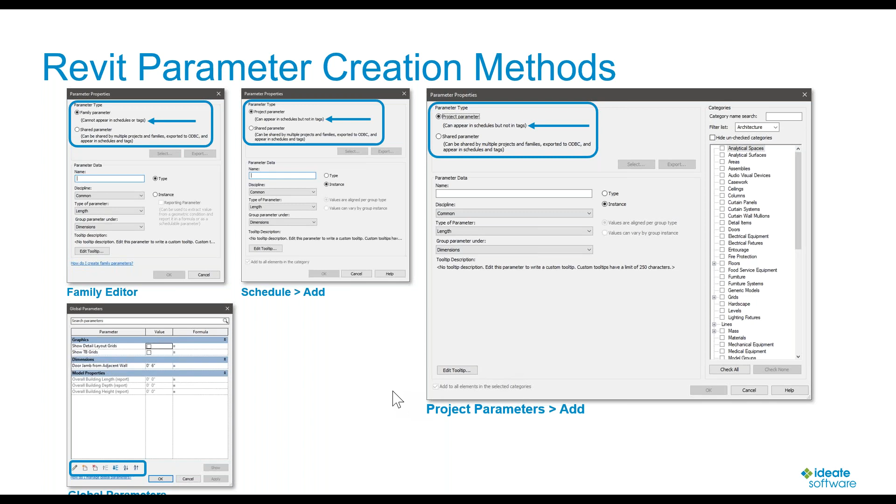And the other important thing to remember about global parameters, because this question does come up often, is how do I schedule global parameters? The answer is you cannot schedule global parameters. And the reason why is they don't have categories. However, whatever values you set in here, when they get pushed into a parameter within a certain category of an element, that is the element that you end up scheduling, right? So the values will still schedule depending on the category, but you don't schedule these types of things over here. So just something to keep in mind when you think about global parameters.

Real quickly, this is just very high level, nothing earth-shattering, but as a reminder, the instance versus type parameters, when we look at it from a project perspective, right? And again, be thinking about should a parameter be a type-based parameter or an instance-based parameter. Very important things to keep in mind. Now, over here it says project parameter, right? One of the things you want to keep in mind when you're creating parameters, and I always have to ask myself this question: if I need a new parameter, should the parameter apply to an entire category?

And again, I'm not saying you're going to use architectural supplemental instructions number as a real parameter in here. I just made this up. But let's just say for argument's sake, I want this to be an instance-based parameter, meaning each individual instance that's in my model can get a particular number, right?

One thing to keep in mind when you're creating a project parameter is when it gets assigned to a category, every element of that category will end up seeing this parameter value show up in the properties list, right? And is that appropriate? Maybe ASI number is appropriate. However, be thinking about this. If you do create a project parameter and that parameter has nothing to do with other elements in that category, is that okay with you?

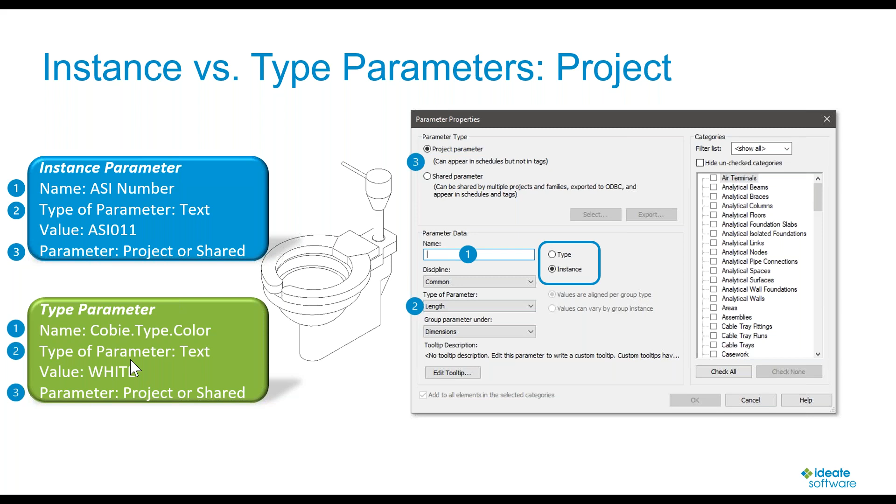And for type-based parameters, if it's assigned just to that particular type, be thinking about, should it be a type-based parameter? So for example here, type color, I mean, even just the name of the parameter with the word type in it really implies that it's representative of that type. I have a toilet and it comes in this particular model and the only color option is white. That to me makes sense as a type-based parameter, right?

All right, and then looking at families, again, because you can have family parameters as we discussed before, which do not appear in schedules or tags, versus a shared parameter, which again can be scheduled and can be tagged. So a good example of an instance parameter, and maybe I should be careful about what I say. I do like to use instance-based yes/no parameters to toggle visibility. That's a really great example, right?

Show the flush valve. Okay, fine. That's maybe more of a graphical type of thing. That would maybe be on a per toilet basis, potentially. You could also make it a type parameter if you wanted to, and kind of turn off all the flush valves in one click of a button. You can certainly do that kind of stuff if you want to.

But also looking at type-based parameters like recycled content, right? And again, you need to decide if that needs to be scheduled, then in this situation, it needs to be a shared parameter if you're going to apply it within the family. Now, if recycled content is going to apply to all the plumbing fixtures in your entire project, then maybe you want to consider making that a project parameter, right? Because again, you don't have to add that parameter to the family. I don't want to use the word append, but it kind of almost appends itself when you make it a project parameter.

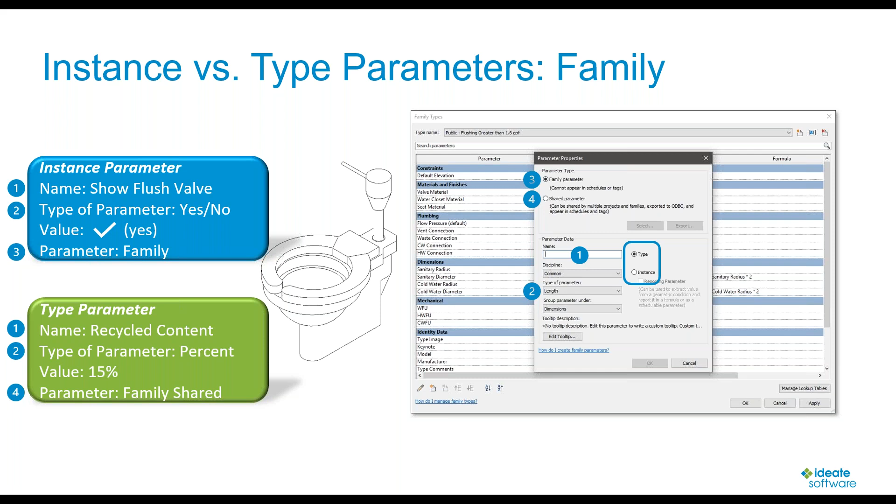But just kind of keep in mind, you really need to understand the different situations and when to use a certain parameter. Again, you can see here, there's a lot of stuff going on. And then, the reality is when you load up the families, when you create the global parameters, all this information really comes together in your project, right? In your RVT files, and we can even say your template files as well.

So things like project shared parameters, right? So again, that's where you're in the project, you say add parameter, I click on shared parameter, and I pick a parameter from my parameters list. That's the project shared parameter, right? And then the project parameter is one that can appear in a schedule, but can't appear in a tag.

That again goes back to, do I just want to go parameter add and just say, I'm going to put the ASI number, and it will apply to all elements in a certain category, no matter where I get the content from, if it's internal content that I've created or I downloaded it from a manufacturer, that's great. I don't care to tag it, but I still need that information in a schedule. That's where it's appropriate to have it in a project parameter scenario.

And then the ones we didn't really talk about were system parameters. These are those hard-coded parameters that come with Revit. Things like project information type parameters or the view and sheet type parameters as well. And then of course, within system families, where most of us are probably familiar with like the fire rating parameter. It's a built-in type-based parameter, right? Mark value, type mark value. Those are all basically hard-coded built-in parameters.

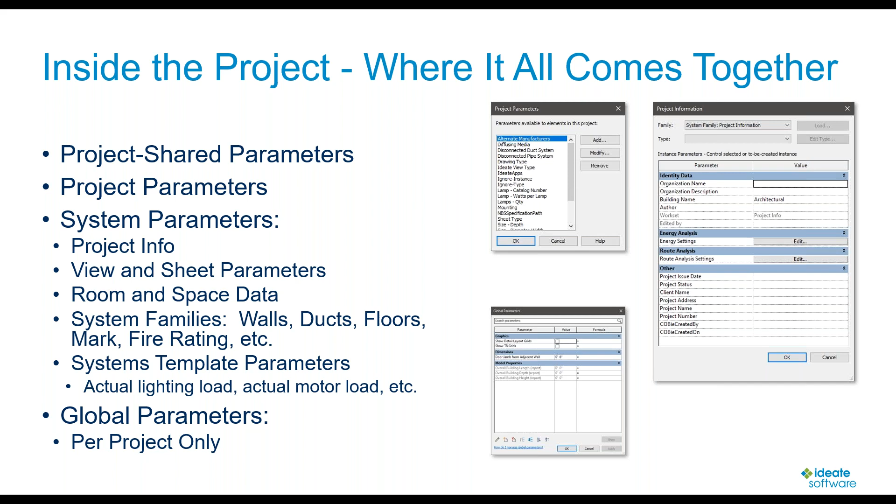Again, you can't schedule those particular parameters. They're agnostic when it comes to categories, right? But however, the resulting values, you can schedule those based on whatever category you're scheduling. So just a couple things to keep in mind there.

The other thing too, we've probably all run into this before, and especially early on in my Revit career, I definitely was not understanding parameters. And we've probably all been looking for the old shared parameters file, right? Where did that thing go? I need to get some of the parameters from it. And that's a little tricky. Luckily, you can actually export shared parameters if you don't have a parameters file. You can write it into a particular parameter file if you want to, and change the category of it and kind of reconstitute that parameter if need be.

But I wanted to point out this example here because I think it's a very appropriate one. Here's an example of two toilets, right? Both have a parameter called ADA compliant. They're both shared parameters. And if you look at the graphics of the dialog boxes, they both appear to be the same. And I'm guilty of this. Years ago, when I needed that shared parameter again, I was like, oh, I'll just recreate it. And the reality is you go to fill in the data or you go to schedule it and you realize that the values aren't populating. Even though the parameters look the same, they may smell the same, the reality is they're not the same.

And if you've actually explored a shared parameters file, you'll see this GUID, right? Which I believe stands for Global Unique Identifier. And that's how Revit identifies a parameter and how it can associate it with a component, but also a tag. They both have to have the same value in order to talk to each other. So if you ever try to make your own shared parameter, make the name the same and all of that, and you go to tag the element and the value's blank, that's because the GUIDs are different.

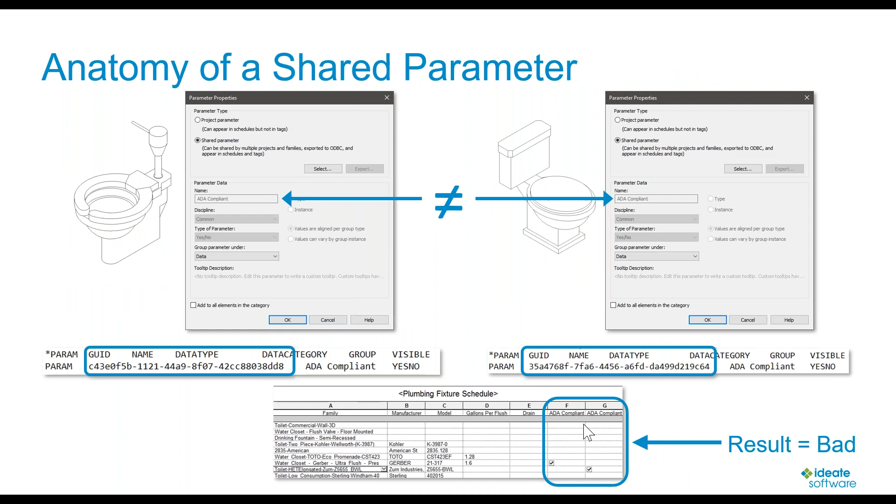And one of the neat things that you can do is if the project parameters are the same name and the same category assignment and so forth, if all that data lines up, you can actually schedule that information in a single column, as opposed to what you see here where we get two columns of data. If you've never tried this out, you should play around with it. It's kind of fascinating.

But thinking about doors, just as an example here, where I have maybe a core and shell model, I have some doors that may be on the exterior, and then I have another model that's an interiors model, and let's just say a consultant's doing the interiors build out. If we want to schedule the same parameter information in the same column, be thinking about how maybe using project parameters may be a wise choice.

Now, again, that's if you want to use project parameters as opposed to shared parameters. The real question is, do you want to schedule it and tag it, or do you just need to schedule it? Those are all things that you need to consider when deciding what type of parameter to pick. Again, you want to get that stuff in your BIM execution plan, get that stuff hammered out before you just start modeling and doing things in your projects.

All right, Richard, before I give a brief demo to everybody, I thought maybe it'd be good to just ask people in the audience, how are you actually currently using global parameters? So Richard, if I may have you go ahead and launch the poll, let's just get some feedback from everybody, because I want to talk a little bit about global parameters, but let's get some information to see how or if you are actually using them. And if you're not sure, that's okay, but we'd love to get some information.

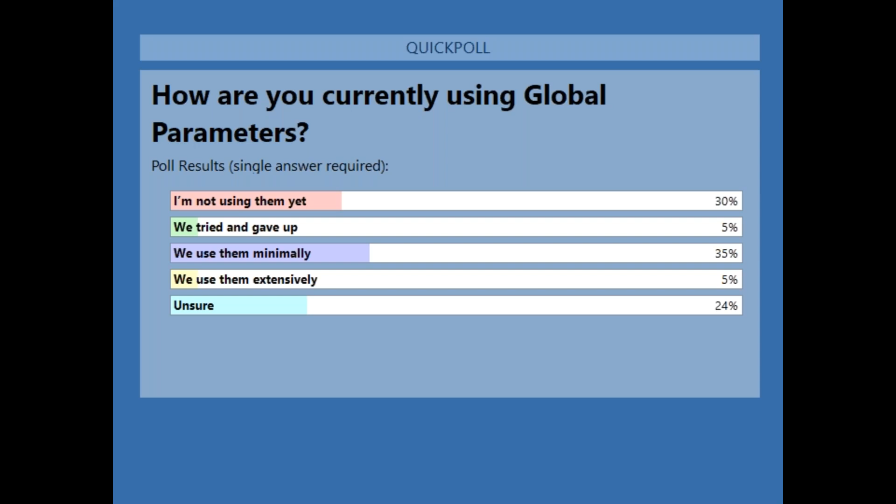All right, so you should see my screen, and I'm going to just real briefly talk about two components here, two features here. Again, not earth-shattering, but just kind of as a reminder. We're going to talk just a little bit about key schedule information, because I love key schedules, and some of the changes that happened finally between Revit 2021 and earlier and Revit 2022. And then I'm also going to talk a little bit about global parameters as well. And then we're going to do the polls and have Jesika speak.

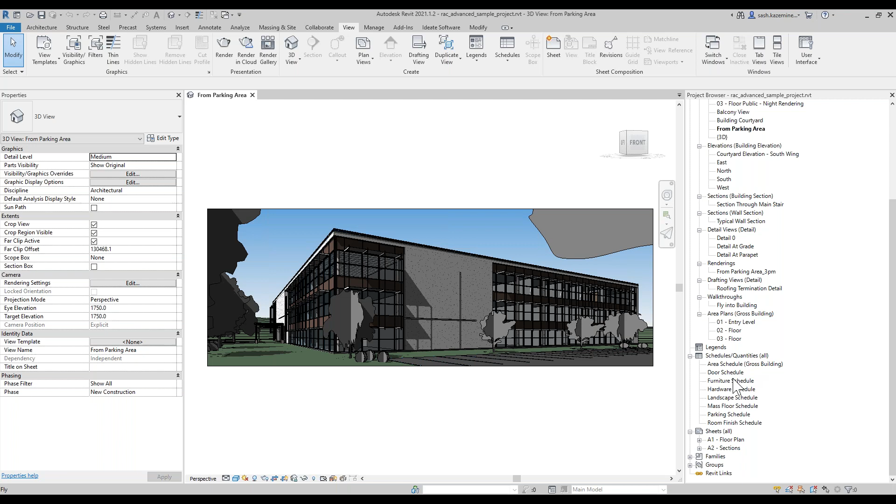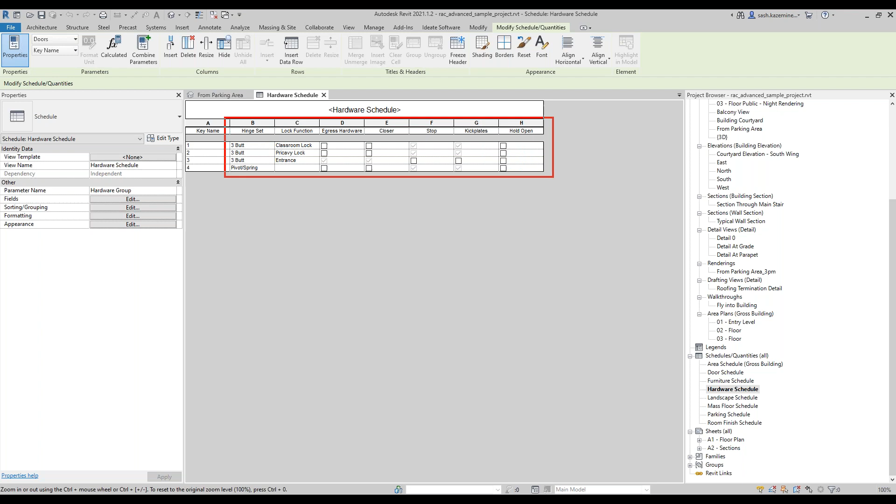But one of the things I want to point out in this Revit 2021 is there was a big limitation that has basically been going on for many years in Revit. I'm going to come over here to a hardware schedule, which is basically just a key schedule. And one of the challenges I think that a lot of people ran into, and this is also like for occupancy calculations, is kind of a similar situation. But the idea of creating a key schedule here and assigning, shall we say, values for a particular, let's say, hardware group, right? I'm just using the out-of-the-box Revit example here.

One of the challenges here is if I come over to the edit fields, you have the ability, of course, to create parameters, which is lovely, right? So it's really nice. But we quickly noticed, most of us did at least, that your only option here is project parameters. And the downside to that, once again, is it cannot appear in a tag. So what if you had a tag that needed that information? Well, this has been a challenge for eons, right?

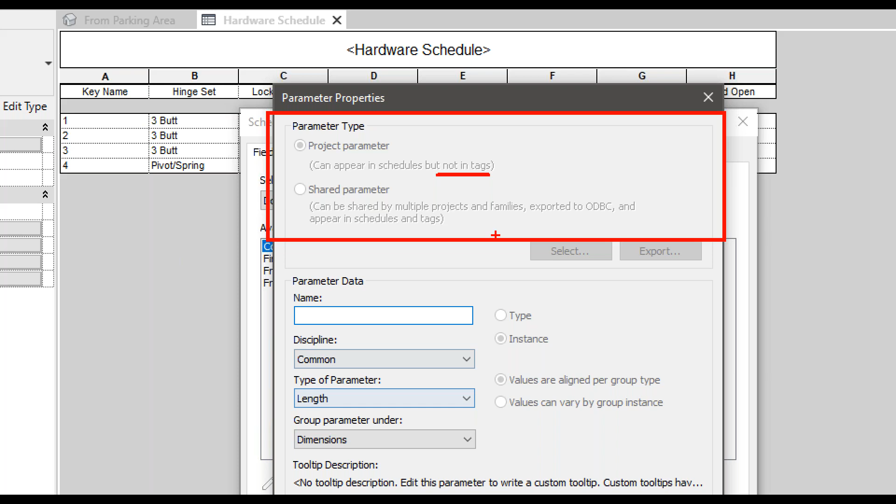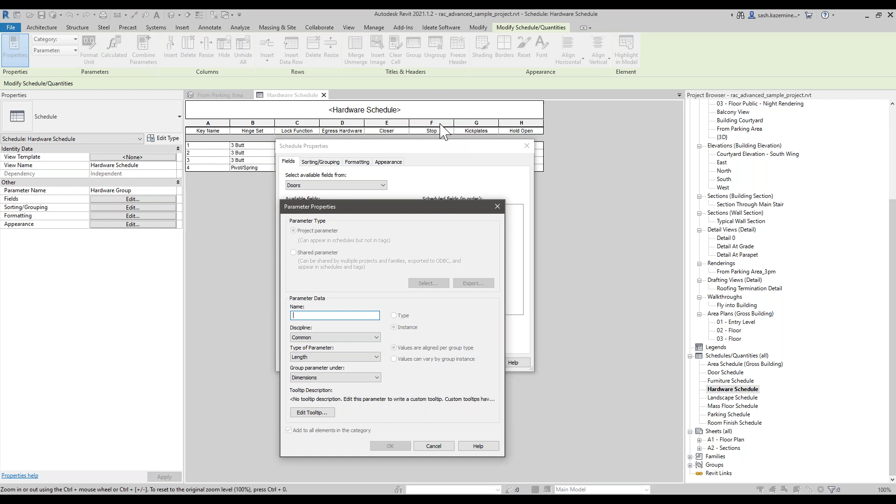So the solution was you had to create, shall we say, a parameter for a tag that you would then basically schedule the results of, this field here as an example, let's say column F, and then you would have column G as the tag value, and you'd have to copy those values from column F to G so you can get that information to show up in a tag. And we use BIMLink all the time for that. We'd say, okay, great. We'll take this column of information, export it out, paste it in here, bring it back in. But if any of the data changed, it was not synchronized, right? So this has been that issue for eons, okay?

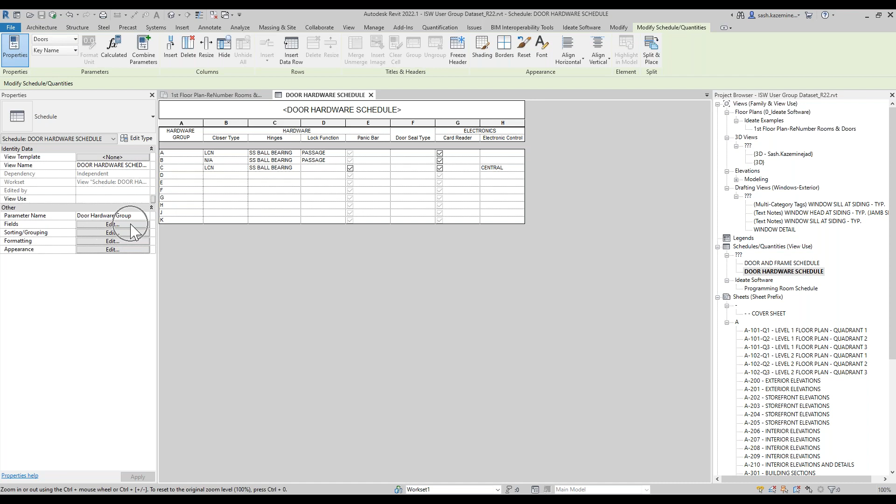But thankfully, Revit 22 now actually solves that issue. And again, just going to make this really simple here, but if I just come over to, let's say, a door hardware schedule, just as an example, and you can see this is not fully filled out, but that's not the point here. Looks the same as any sort of hardware group, but now when I come over to the fields over here, and I come over to the create, this is what we've been waiting for a long time. And again, why do we want a shared parameter? Because I want it to not only appear in the schedule, which is what it's doing now, but I want it to appear in a tag. This is something that we've needed for a long time, right?

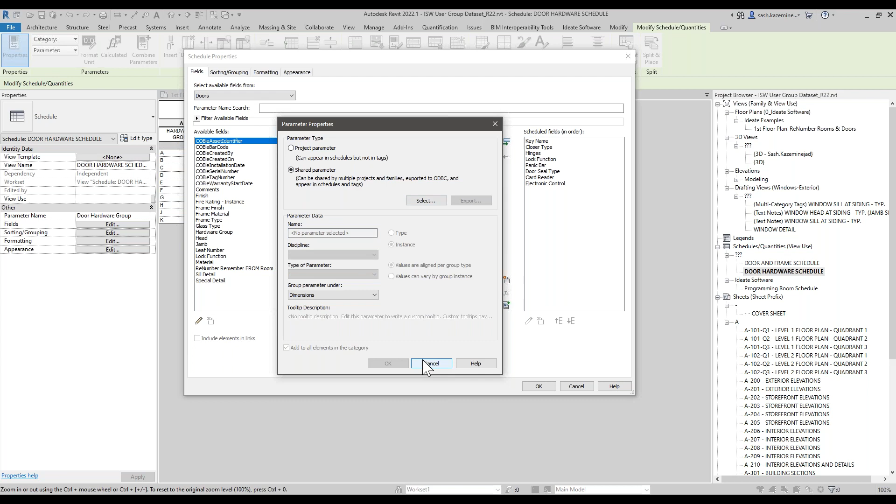So again, you just know the process. You come to shared parameter, you select it, etc. And the nice thing is it'll show up in this list just like a project parameter. But the big difference is, and again, this example I'm showing you here may not be exactly what you want to do, but what's really nice about this is you can actually assign these, the hardware group here, and it will fill in that information and I can tag it.

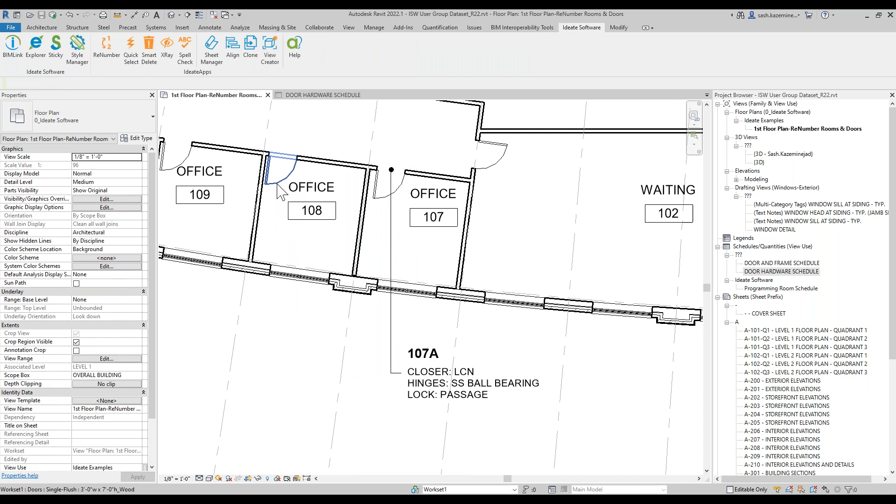So as an example here, if I select this door, and again, it could be a door, it could be a piece of mechanical equipment, it could be a column, it really doesn't matter what it is. But you can see here when I select it, I can see some of the information from that key schedule show up in this list, right? And you can manually input that information if you need to.

However, if I come down here to the door hardware group and pick a particular group, let's say it belongs to A, what's nice is it fills in this information over here, which is what I want, and it puts a little equals over here that says the parameter is set by a key schedule, right? So that's something that is really, really helpful in this situation, right? So I'm glad that they finally implemented this.

It's been a long time coming, but I wanted to just kind of point that out to you, that you now have the ability to do that. So if you weren't aware of this, this is a 2022 and newer feature. So be sure to check that out. It may resolve some of the challenges that you're running into.

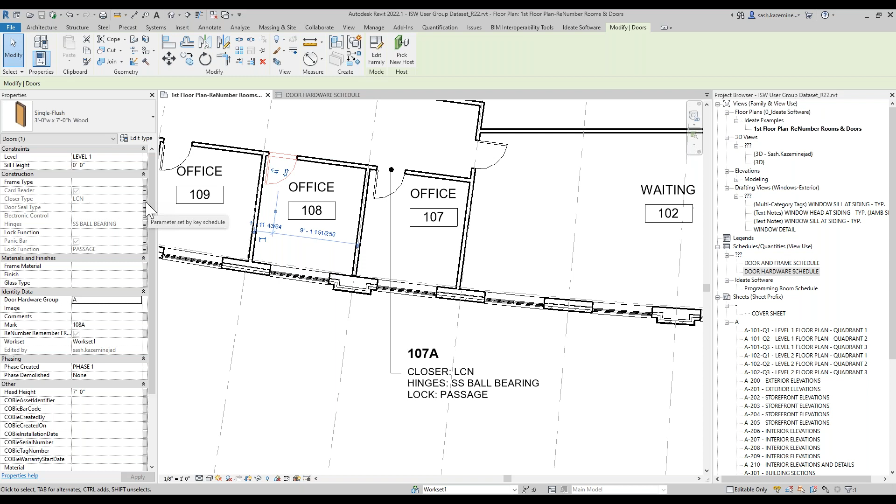Okay. And I see a note from Tom here. We'll talk about that for sure later on.

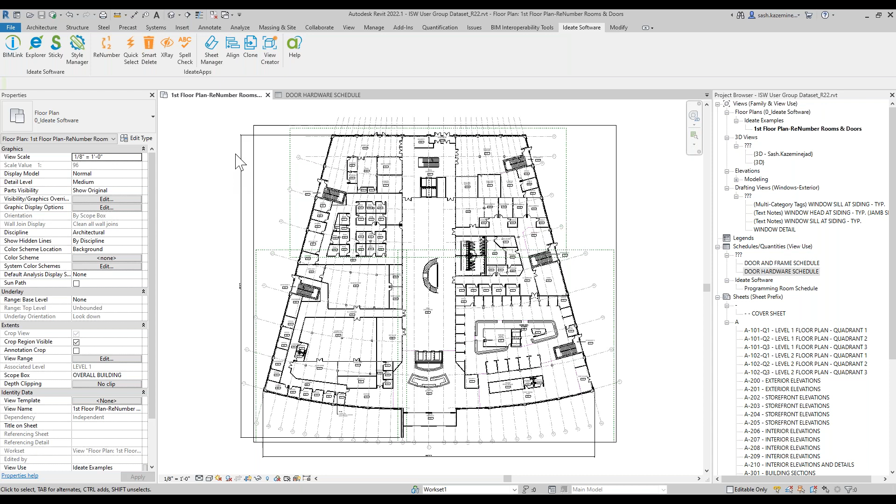All right. Now, going back to this poll that we had over here, which is, how are you currently using global parameters? I would love for those folks that are using them minimally and extensively, if you get a moment, type in the questions panel, let us know how you're using them. It'd be great to kind of get an understanding, but I figured I'd just take a few minutes and just talk about global parameters. Again, what I'm showing you here isn't earth-shattering, but nonetheless, I wanted to just kind of mention some of the ways that you can use them.

You'll see over here, again, I just have kind of an overall dimension that may represent the building width and depth, and I can certainly have one for a height. If I come over to the Manage tab and I come over to Global Parameters, here's where you can create some global parameters. And the creation process for global parameters is very similar to creating any sort of parameter in Revit. However, there is no option here to pick a category. Okay, so as I mentioned before, they have nothing really to do with categories, and you can't schedule the global parameters themselves. You can only schedule the resulting value from whatever category of information they're being pushed into.

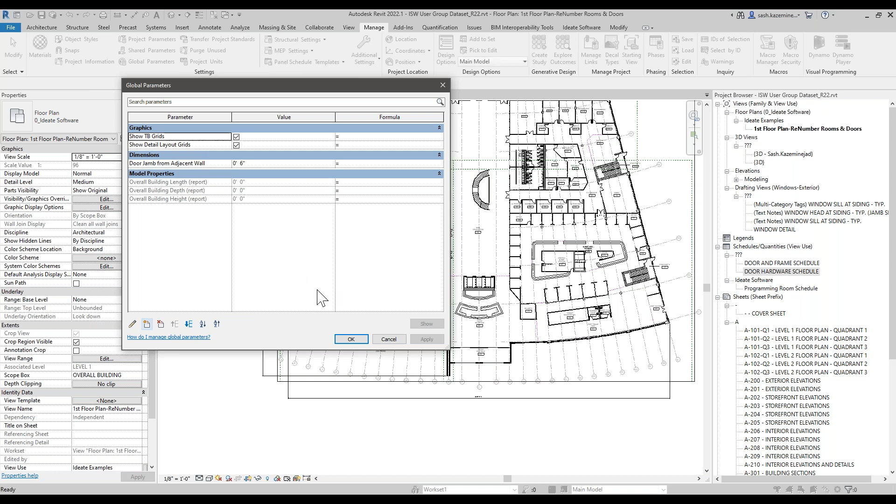But you can see over here, I've created a few parameters that are just kind of reporting parameters. This door jamb from adjacent wall, maybe you have some sort of office standard that says all your doors or all your furniture or all your equipment shall be some sort of exact value. I don't know, I'm just kind of throwing that out there, okay? And you can see I have some visibility ones, which is kind of the one that I had picked up from Brian Mackey. I was like, oh my gosh, why didn't I think about this before? But let me just show you real quickly how this kind of works.

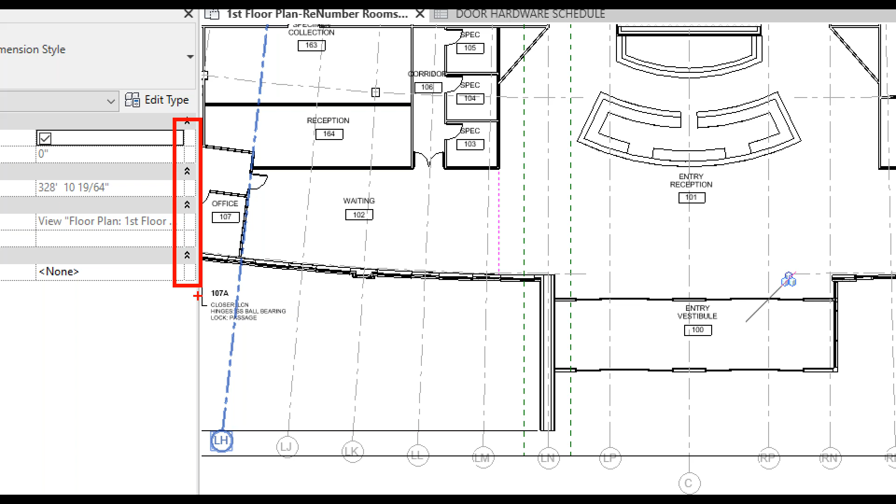As an example here, if I take this dimension over here, normally when you assign global parameter information, you'll see this little area right here in the properties dialog box that usually has a button, and you click it and you can associate it with a global parameter. In a situation with a dimension over here, you end up picking a label from up in here. And if I click over here, I could say, just show me the building length, and it's a reporting parameter. And when I do that, it'll show up in my global parameters dialog box, and I'll show that to you in a moment. And if I come over here and pick this, I could say maybe a building depth as a report.

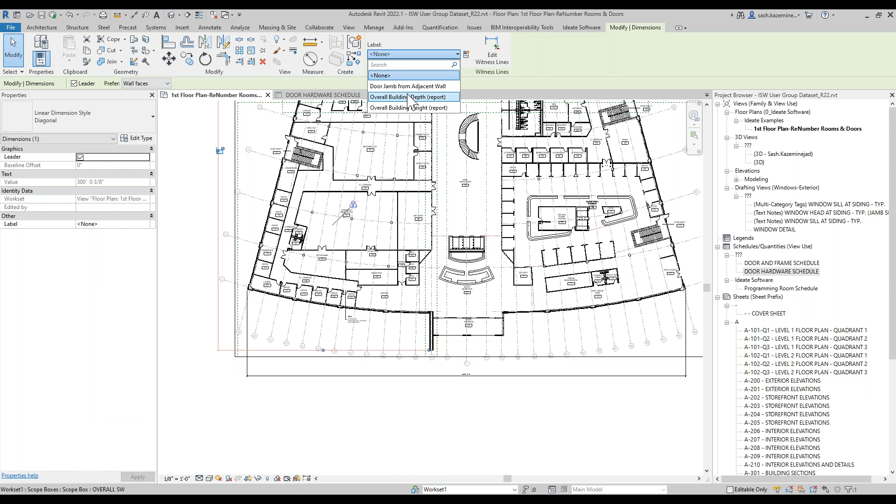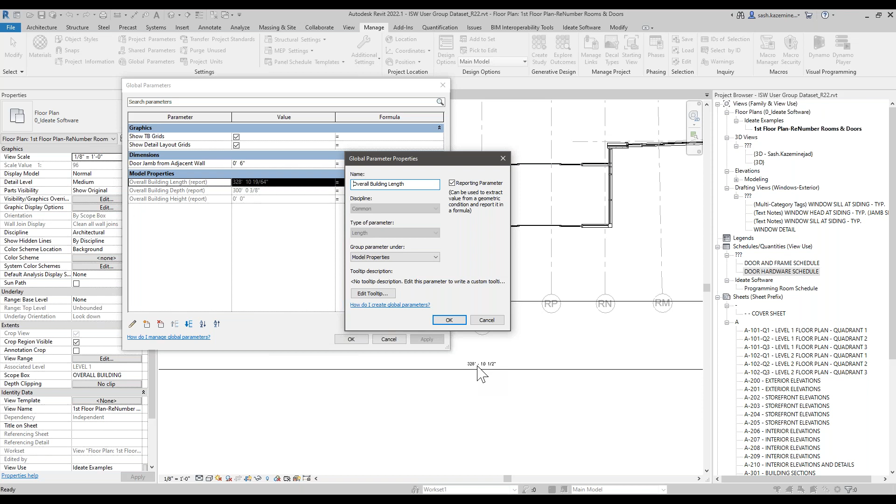And what's interesting here too that I noticed, and we probably have to look at the units for it, but if I come back to the global parameters, we could see here that I'm getting that reported information. And if I go to edit parameter over here, it's not really giving me the ability to change the precision on it. I believe that's going to be a project units overall setting, as opposed to the actual dimensional settings, which can be independent of the project settings. But nonetheless, I can get the information reported in here if I wanted to. So that's another example right there.

All right, what else can I do with some of the global parameters? Well, and again, as I mentioned before, maybe you have some sort of standard that sets a minimum dimension from a wall just for a door jamb. So let me just show you an example of what I'm talking about. If I come over here and let's say drop a dimension from here to here, and again, you want to make sure you hit the doors.

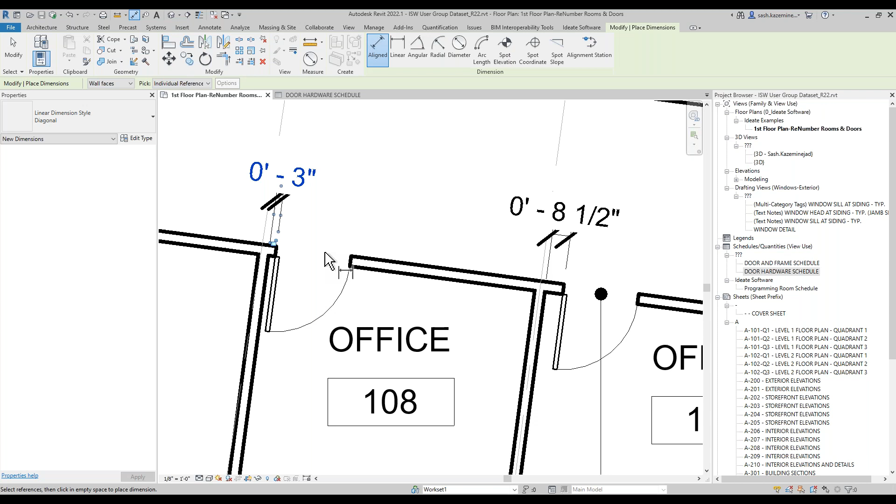This is just a simple example. We see people doing this for concrete slabs. We see people using this for ceilings, like ceiling plenums. Maybe they have a certain depth that they want, so they'll control it all from a global parameter.

So in this example here, you can see I have this 3-inch and this 8.5 inch, and if I select this dimension over here, again, I can associate it with a global parameter. You'll notice over here, I don't see all my other parameters in here. I just see this door from adjacent wall. And if I select it, you can see now they're both 6 inches, right?

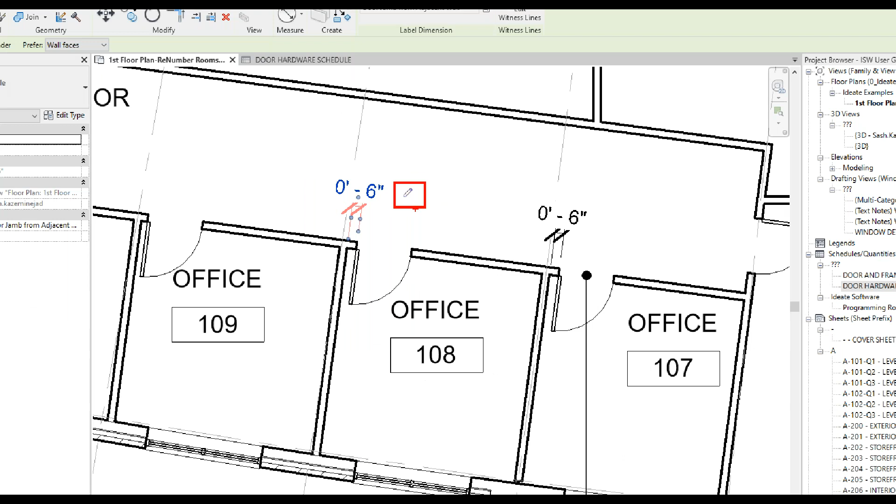And if I click over here, you'll notice this little pencil over here. And that indicates that it is part of a global parameter. And if I click it, it is nice that it launches this dialog box. And if I make it 8 inches, I can hit OK, right? And you can see that they both change.

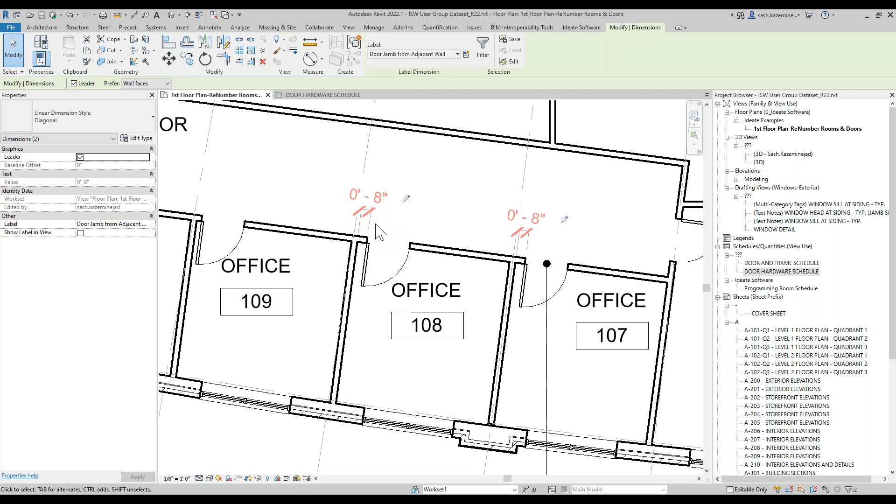So if you wanted to control that and kind of make it some sort of globalized setting, you can do it. Now, if you don't want this dimension to show up in your construction documentation plans, again, you can put these in working views. A little bit more subtle, maybe a little dangerous here is you can certainly remove those dimensions. And you can see here that it's still constrained. And if I hit OK over here, if I do come back to global parameters and let's say I make it 1 foot and hit apply, you can see they still move.

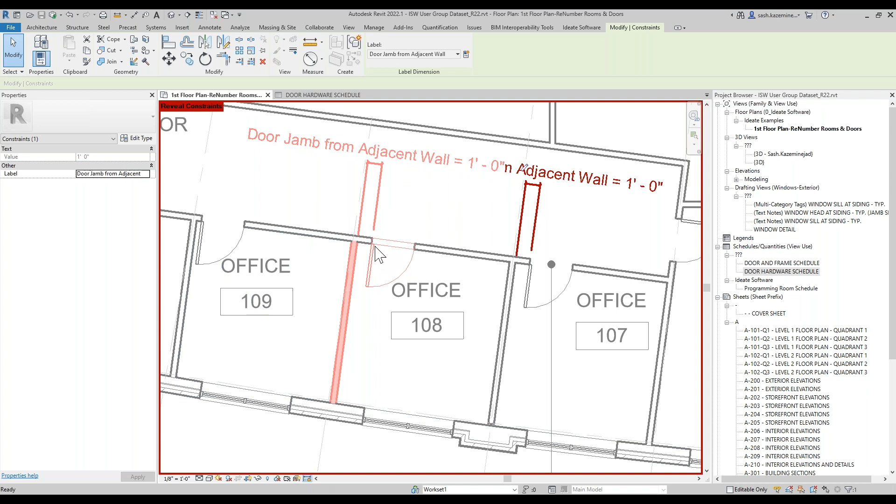And if you're looking for those dimensions, you can always hit the reveal constraints. And that's going to go ahead and show you those global parameters. If you need them to be completely wiped out, you can remove that dimension from there. So that's another example.

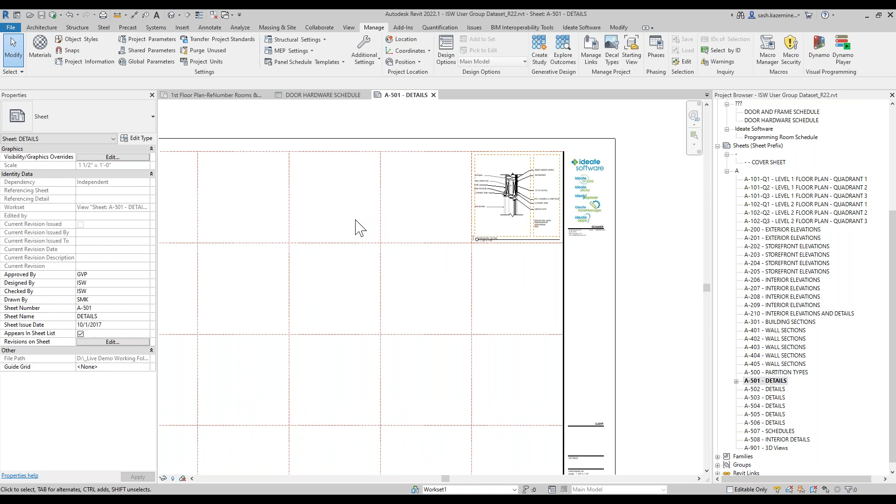And the last one that I wanted to show before we do the polls and give the reins to Jesika is one that I picked up a tip from Brian Mackey. So thanks for this one, Brian, because this is one that I struggled with for a long time. I have a detail sheet over here. And I like my own grid system in here, and I'm using like a symbol family over here that kind of represents like 1 column by 1 row.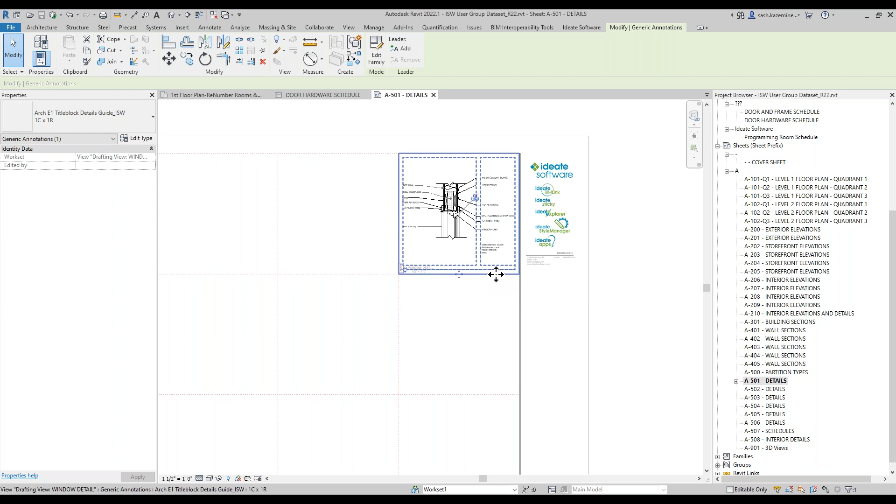And the whole idea behind this is it kind of lays out a framework so that I can get my details and my notes kind of in alignment. And I know people out here use this. I use this all the time. And so one of the struggles that I had was, before I go to print, how can I control this?

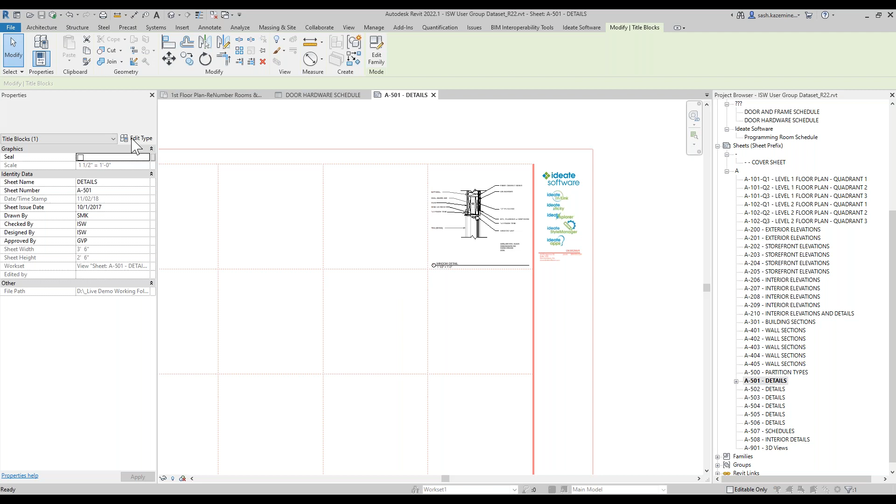Now, I would have to remember to come over here, and if I had tons of these different sizes, depending on my detailing, I would have to come over here and say, okay, great, I got to go to edit type, and I need to turn off my detail guide like so, right? And then for my sheet, I would have to do the same thing. I'd have to come over here, go to edit type, and turn that off, and I have to do that for each one of these before I go to print. That's a lot of work, right? So instead of doing that, let me just go ahead and undo this.

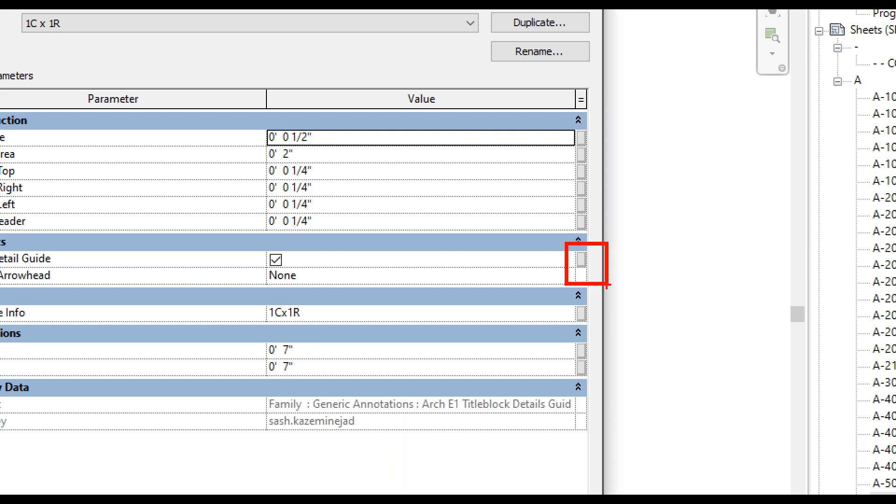What I can do here is I can associate this with a global parameter. So you saw me earlier mention that you'll see buttons over here that allow you to associate that. And so in this example over here, I can click on this and say, oh, I want to associate it with a global parameter. So this is my detail layout grids over here. And now you see it grays it out.

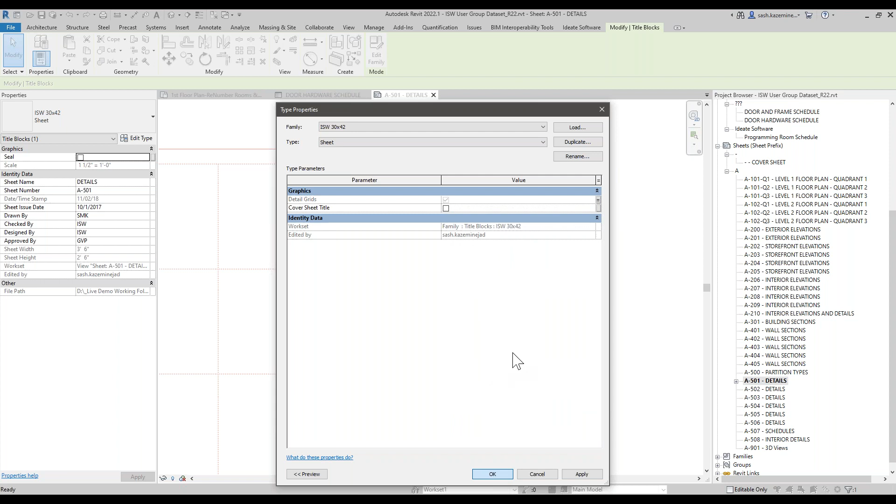And then the same thing for the title block. I can come over here, go to edit type, and in the same situation here, I can go ahead and say, yeah, show title block grids, right? So I would basically just do this for each type, and that's all I have to do rather than me going and finding each of these sizes and turning them off before printing.

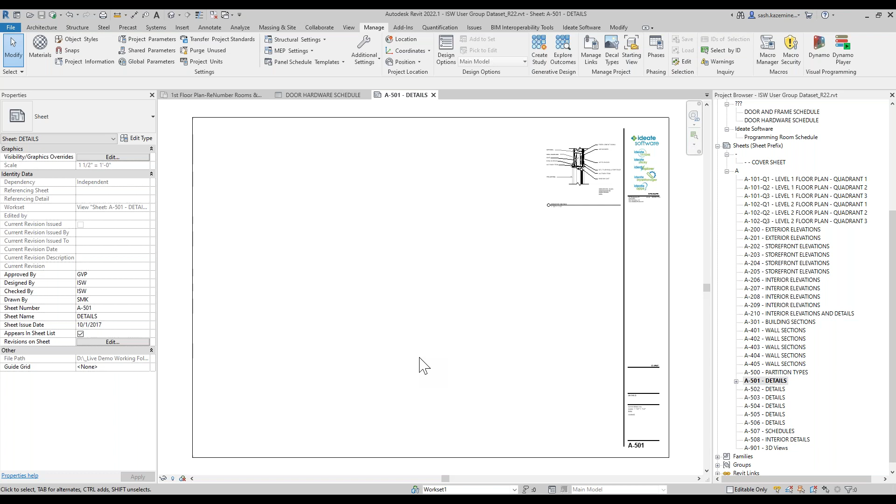And then all I need to do is just come to global parameters and say, oh my gosh, let me just do that. And when I'm done, I'm ready to print. And then when I'm done printing and I need to go back and do some detailing, I can come back over to the global parameters and easily turn those on.

So again, there's a lot of use cases for global parameters, but here's just a couple of examples that I wanted to show you here. And so with that, what I'm going to do here is ask Richard to launch polls 2 and 3, and then Jesika will speak, and then we'll open it up to the audience.

Yeah, and Sash, I just wanted to mention that quite a few people have been typing in their use cases for global parameters. So I've tried to respond back to everyone that's a great use case, so that everyone can see them. They're not really questions, they're more like use cases that people were commenting on, and then everyone can share them. And all of them have been really great. I love it. Even the one from Brian that I hadn't completely thought about was using it instead of design options. Was really interesting.

Very clever. Yeah, I will go ahead and select the next poll. And so in this poll, as you should see it, what is your biggest parameter management challenge? This will be an interesting one to see what the results are.

I think my biggest challenge is saying parameter management challenge 5 times fast.

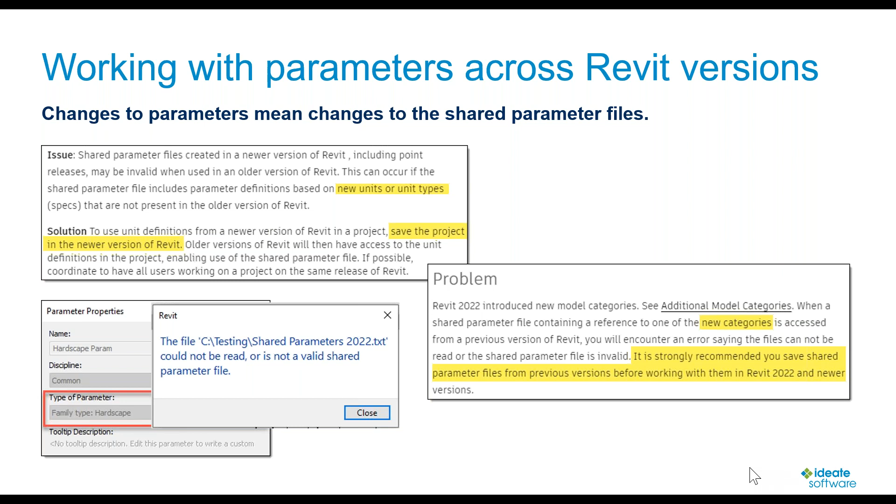So one of the things is just having a strategy in your company for dealing with this situation. And these are like the 4 major ways to handle it. Either start versioning your shared parameter files, so that you have one that works in each version of Revit. That's not a lot of fun, especially when it comes to adding new stuff and, like we've talked about, combining files. The second item is just to not use any of the new features and stick with the stuff that works in every version of Revit. It's not very exciting, but there may not be features that you feel compelled to use anyways.

The third, which is the one no one's actually going to do, is to have all your projects on the same version of Revit. It seems very, very unlikely. And the final one is that if you do make changes to your shared parameter file that's not compatible with old versions of Revit, you just stop putting shared parameter files in those older projects, which also seems unlikely.

I wanted to also bring up that the terms people use for parameters, they're changing. And like a lot of things in Revit, being able to talk about things clearly is the important starting point. So if you are talking about parameters, there are some confusing terms, and you may be talking past each other on your team if you don't understand that they are talking about the same thing you are, but using different words for them. So I wanted to highlight some of the differences that could cause some confusion.

So in this screenshot, I have highlighted 3 different items. The green says parameter type in a couple of the windows. It's referring to whether it's shared or not shared, really. In this case, it's project only, because in these UIs, you can't see the family and the project stuff at the same time. But in the API, it's called get type ID, which is getting more than just whether it's shared or not shared. There's other ways to find out it's a shared parameter. But if you have someone in your company that's using the API, they may be using different terms than what you're used to seeing in the UI.

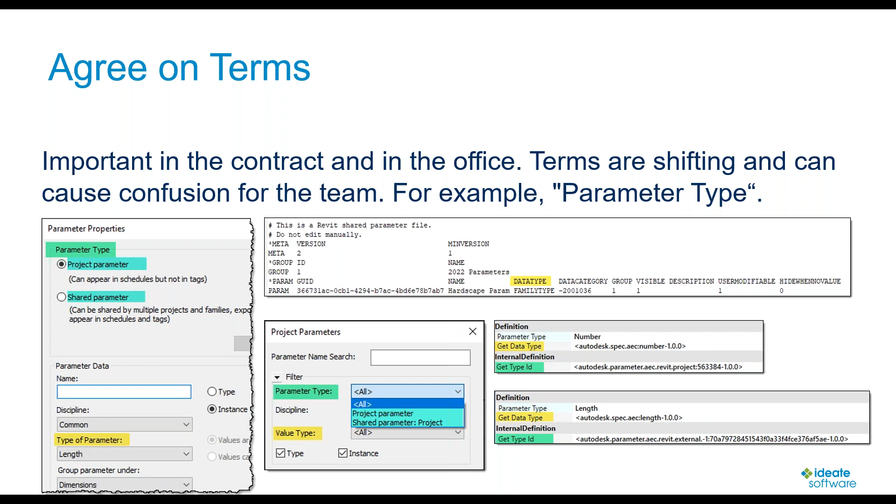So just having discussion in-house with your team about what you're actually talking about when you use different terms, maybe actually defining them somewhere for people to reference, might be a good exercise to do. And it applies to more than just these parameter ideas. There's other things in Revit too that can get confusing. And you want to do the next slide there, Sash?

So the other thing I see on the forums a lot when I'm looking around trying to solve my own problems is people getting confused by shared parameters doing things that they don't expect them to be doing. One of the things is it's a shared parameter file that's been added to your project, but it's read-only. You can't change it for some reason.

Another is that it shows up on some elements and not others, which is a feature where it's hidden when it doesn't have a value. And the final one is it's not listed anywhere, but you keep getting this message that says it's already been added. Because it actually is there, but it will not show it to you in any UI at all.

So all of these are features that were added to Revit to help support people doing add-ins or macros or Dynamo who are maybe doing some calculations, or they want to make a certain environment for putting inputs in so that you only can input certain parameters when it's useful and hide the ones that you don't want them to input when it's not useful. And a lot of these are tied to the API. The API has access to these things where you may not have access to them in the UI.

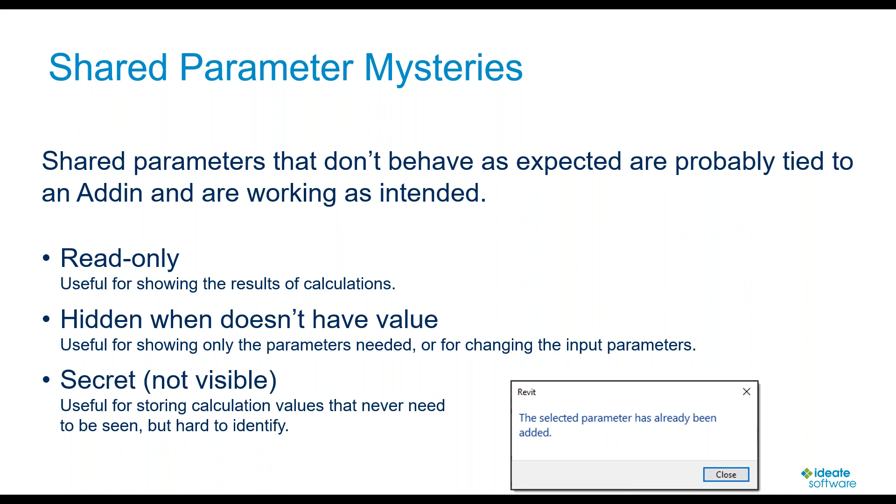So if you run into a weird situation, it might be from one of the tools you've installed, it might be from some in-house development, and that's kind of where you should start looking for why these things are, where they're coming from and why they're doing what they're doing. So if you want to show the next one, here's some examples. I made a shared parameter file with an example of kind of each one.

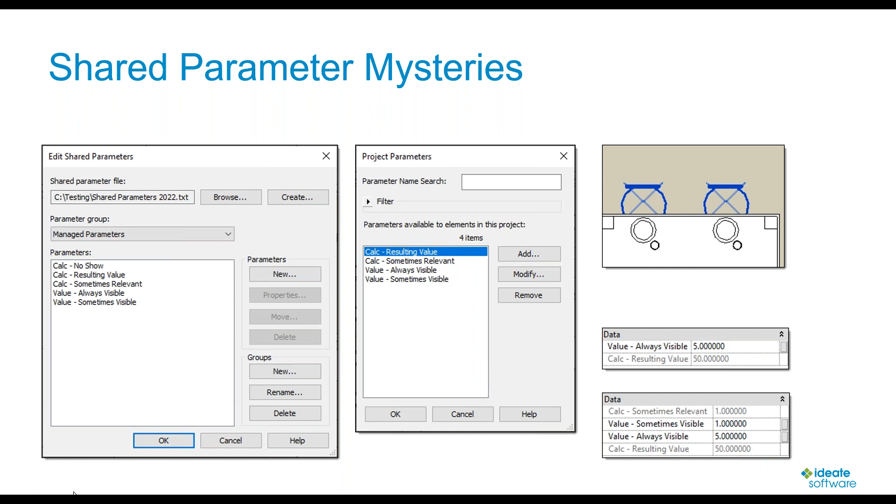And then one of the things we want to talk about is, these changes are important. We are very much invested in handling these differences between Revit versions. We support 4 versions at a time. Whenever we make a bug fix, it goes into all 4 of those. When we bring in new features of Revit, we do our best to make them as backwards compatible as we can. Of course, the API may not let us do that. But we are also planning for the future. As the API changes, we try and be proactive in preparing for those changes.

So right now with 2022, all this stuff has been added. The anticipation is that that old code is going to start going away. So you may see tools break, you might have people developing stuff in-house that are going to have some struggles as they're forced to adopt the new APIs, and they are very different for 2022 than they were in the past. So the biggest change is, well, there's 2 changes.